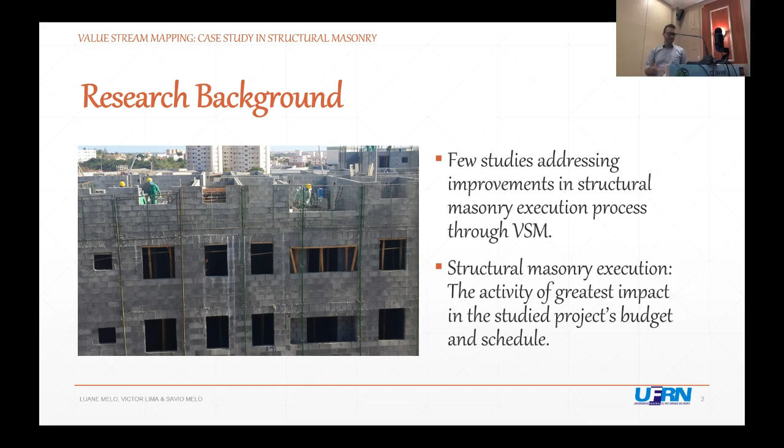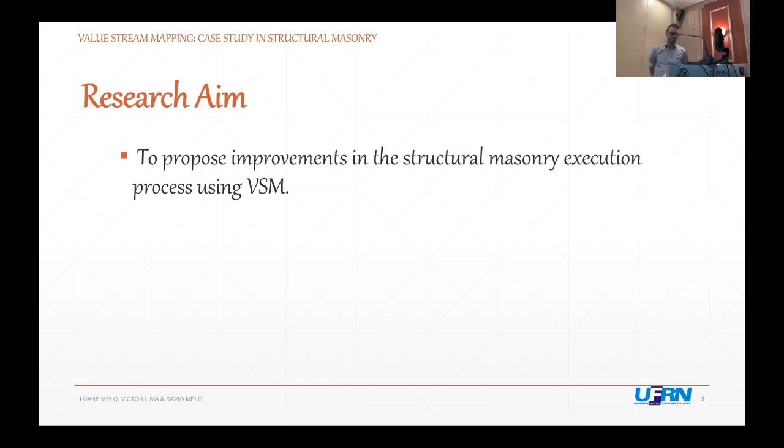So our aim was to propose improvements in the structural masonry execution using the value stream mapping. We followed 4 of the 5 steps proposed by Rother and Shook, from the Learning to See book. And the project was 14-story residential towers, and the study was carried out in one of them.

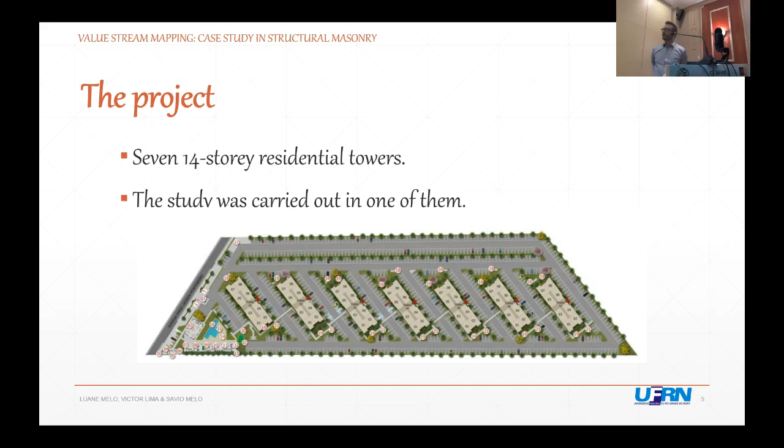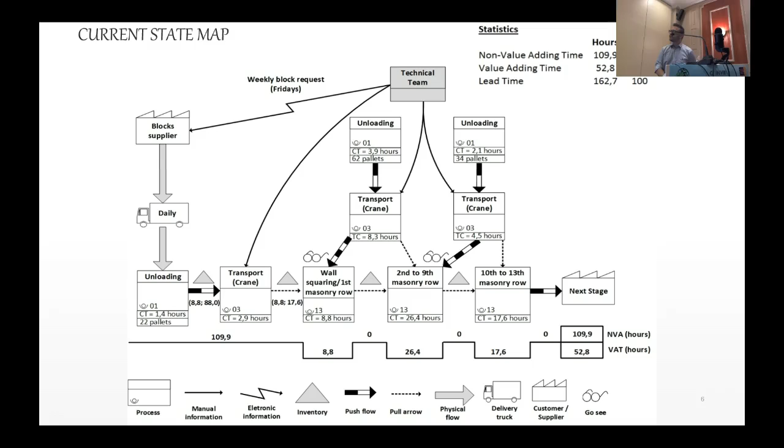So as you can see here is our current state map, and we have in the upper side the information flow, and in the lower side the physical flow. So we have mapped from the request of the blocks until the next stage, that would be the formwork for the slab. So the first thing that we noticed, the process starts with the request for the blocks. Every Friday someone goes there and checks manually the stock of the blocks and compares it to the demand for the next week, and adds a safety margin for each one of these amounts required.

And you can ask me now, why is this guy adding a safety margin? Because of the block supplier reliability. They are facing problems with delays at the project site, and also variability in the dimensions of the blocks. So usually they add a safety margin so they don't stop. And the process starts with 118 pallets. It's the amount necessary to complete a floor, and these 118 pallets are divided into 3 different block typologies.

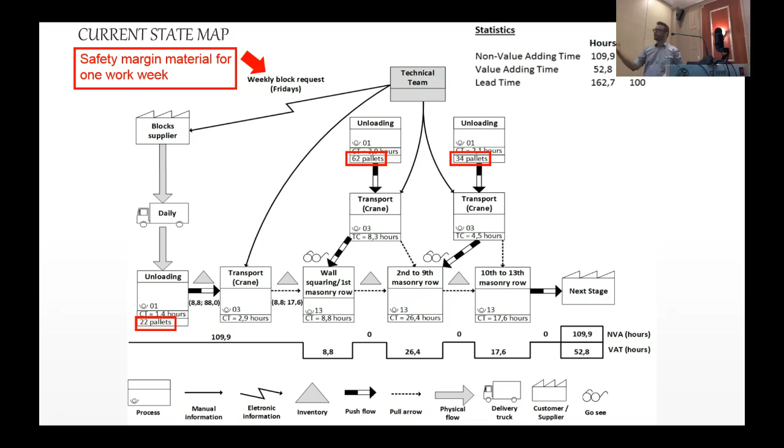So when these pallets are unloaded at the construction site, as you can see here, there is no material management. They are placing them wherever they have space or where the trucks can reach, and they place the pallets everywhere with no particular order.

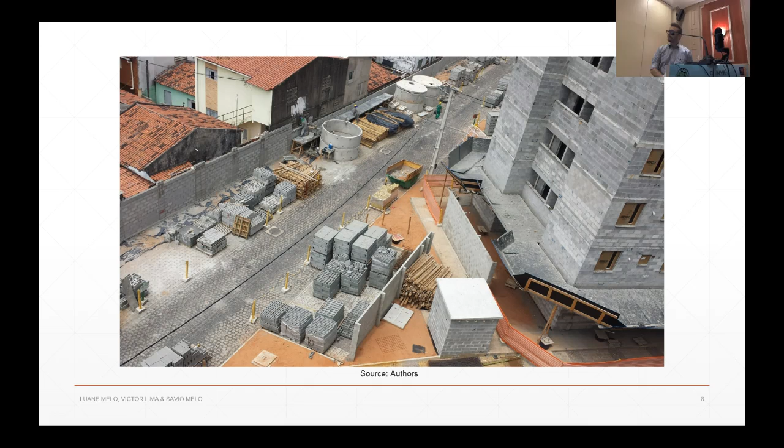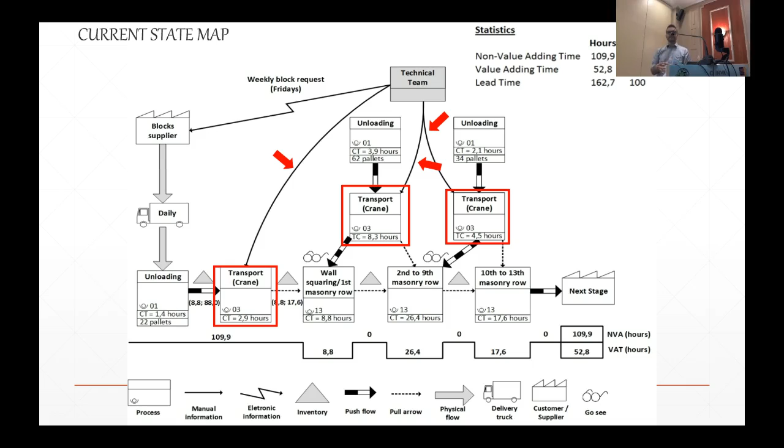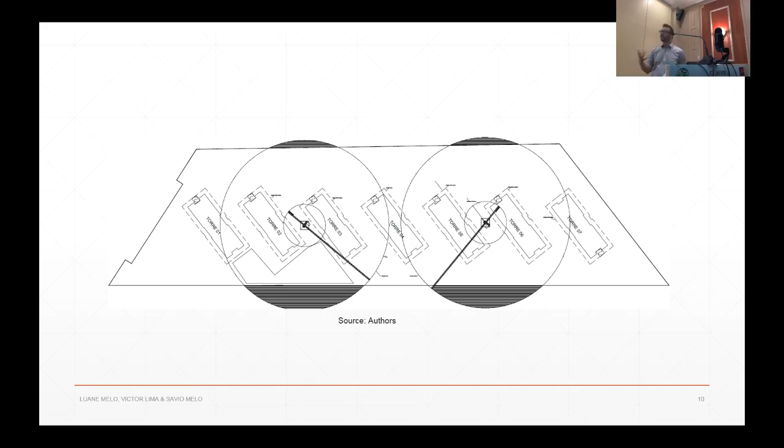The second main phase of the process was the transportation to the floor. We, and the project team as well, saw this as a production bottleneck. This transportation was made with the help of 2 cranes for the 7 towers, and they were taking too much time for transportation due to problems in the information flow with the crane operator. So the signal man, who is the eyes of the crane operator, was sending the information and picking the pallet which was nearest to the crane. There is no concern about the distance and the site layout.

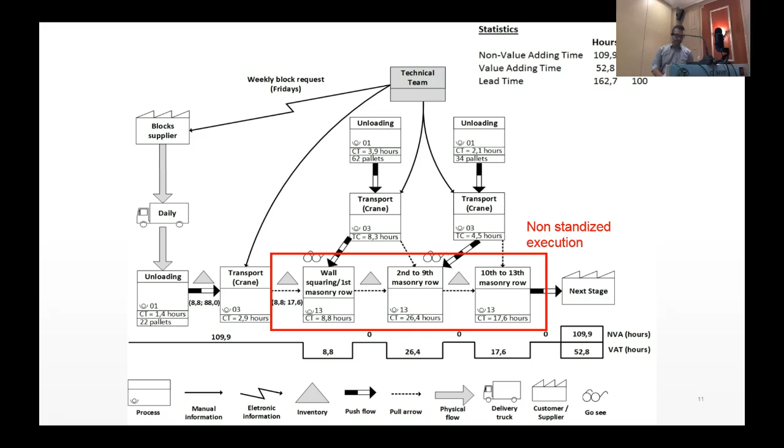And the third thing that we found was the execution itself, which was not standardized. So we also have variability in the execution process as well. So as you can see here, we have 109 hours of non-value adding time, and only 52.8 hours of value adding time.

So if we made an analysis of the current state, we can see that the 3 main aspects that we need to improve are the unloading, the transportation, and the structural masonry execution itself. The main wastes are the time to check the blocks on site every Friday, the block inventory waiting on site from 1 to 10 days because of this lack of reliability of the supplier, the unloading with no material management, the transportation with the cranes, and the masonry blocks are not previously cut. So they also spend some time cutting the blocks on site.

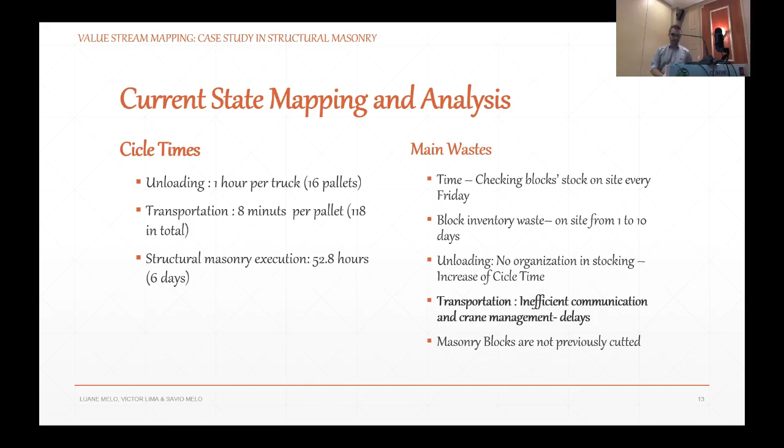So in our future state map, we proposed some suggestions to reduce the lead time, and our main suggestion is to include a supermarket, which can be like a box right on the crane, so the workers can have an instruction. They pull the information to the suppliers, and they can use Kanban to do this. And we also have some Kaizen bursts, which means that we are trying to standardize the execution of the work itself.

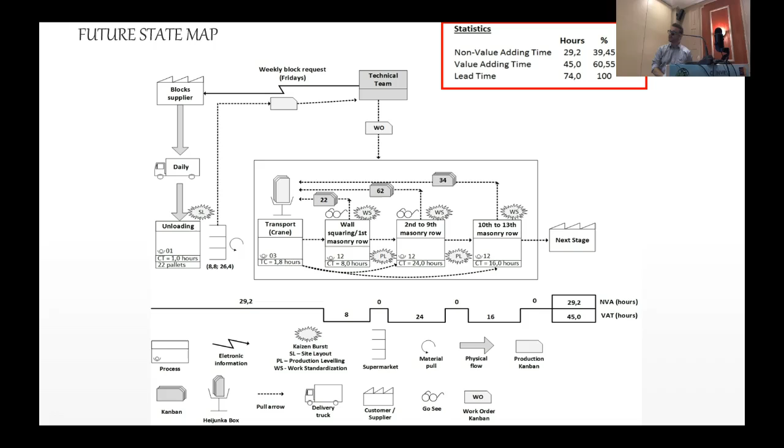So if you compare with the current state, the non-value adding time would be reduced from 109.9 to 29.2. The value adding time would also reduce from 52 to 45 hours, and the lead time of the process could be reduced from 162 to 74, which could be a reduction of 45.48% of the total lead time.

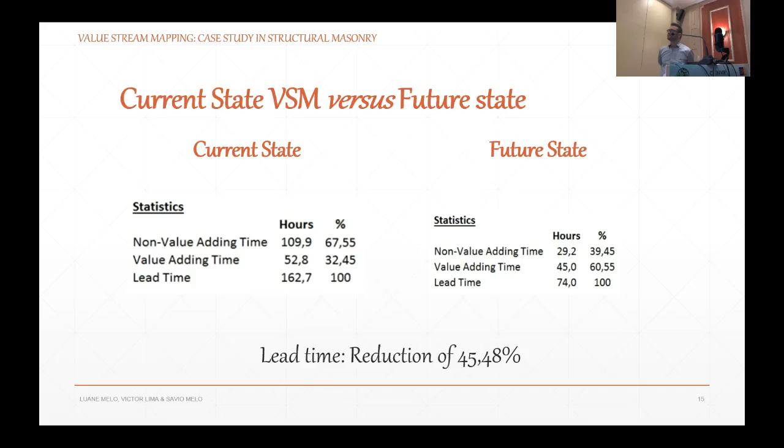Our main conclusion is we used this tool as a way to identify waste and propose improvements to the process. So the main wastes that we identified were excess inventory, material transportation, information flow, particularly with the crane operator, unnecessary movements in the structural masonry execution, variability in the team productivity, and also in the execution of the process.

The main proposed improvements were reduction of the block inventory, reorganization and proper material management of the block storage, a Kanban system to improve the information with the crane operator. Maybe it would be possible to negotiate with the supplier to see if they can deliver cut blocks to the construction site, and work standardization and production leveling.

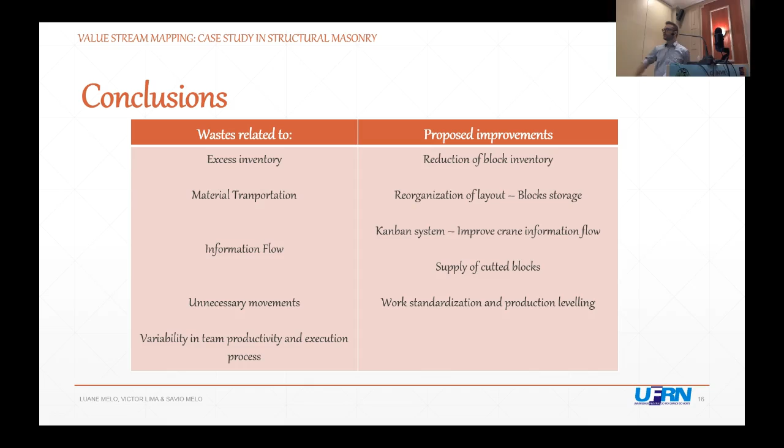Our main limitation was that the upstream supply chain stages were not included in this value stream mapping, and we also did not develop an implementation plan so we can test all the improvements that we proposed. So some future work is analysis of the relationship between the construction company and the block supplier. That's a huge problem back in Brazil, the kind of trust relationship with the supplier. The internal process of the block supplier itself, we can also identify and improve, and whether it is possible to deliver cut blocks on site instead of doing this activity on site.